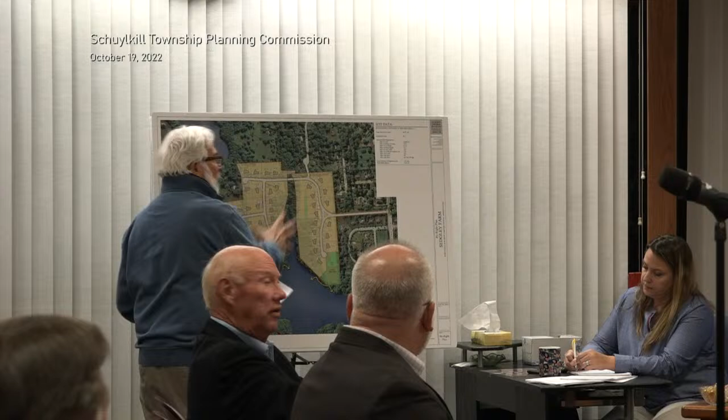So the project. Why don't you take the mic? It's portable, you can take it right up. Guess it's a good thing I'm not chewing gum at the same time here. Okay. I'll try to stay to the side here so it's okay on TV. Also from our development team, we have John Snyder, our land use attorney, and Jeremy Mazar from Chester Valley Engineers, our project civil engineer.

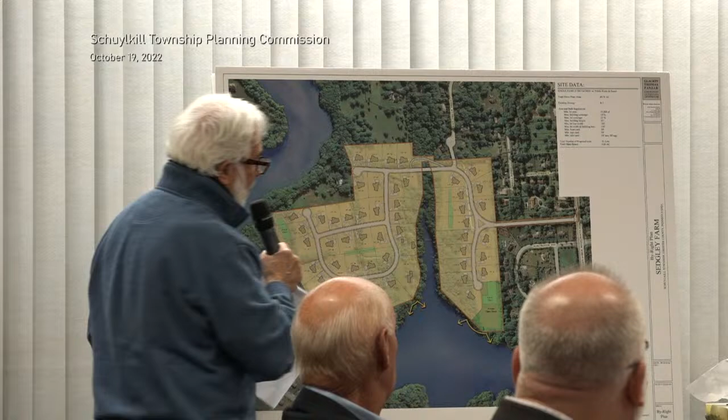The project is a 51-lot single-family development encompassing a little over 66 acres, comprising the Reeves property, shown in yellow, and 876 East Phillips Drive. There are 4 existing residences on the property: 1 on East Phillips and 3 on the Reeves property, including the William Reeves home, which is eligible to be on the historic register, a carriage home, and a tenant house at the back end of Lot 19.

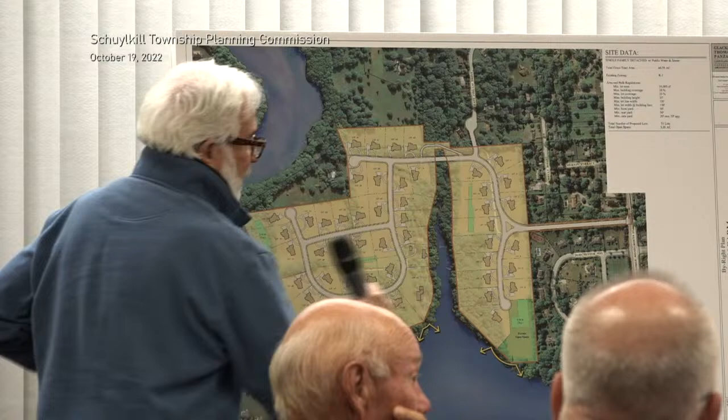It's located adjacent to Pickering Reservoir. Just a note, north is oriented to the right on this plan, because generally plans are drawn north-up, but due to the shape of the property here, north is to your right. The property is accessed from Valley Forge Road to the north and East Phillips Drive to the west. It's located in the R1 zoning district, and it abuts R2 zoning on the northwest — both the East Phillips area and Wells Road are R2 zoning — and on the northeast, Dorchester is R1 zoning.

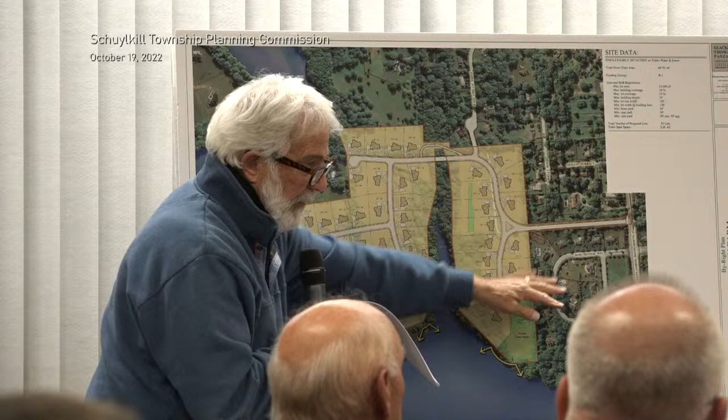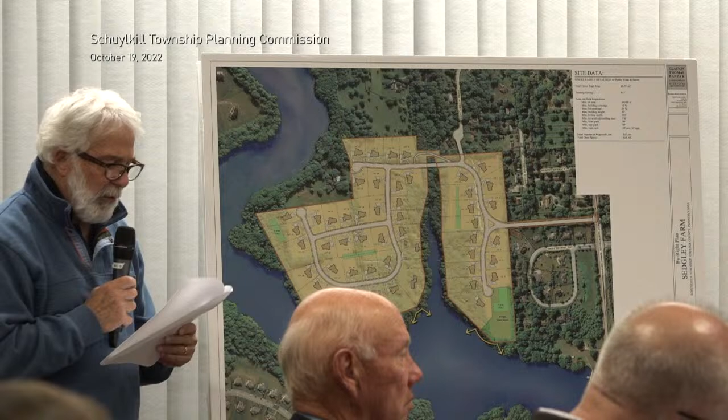As brief background, we last left off on this project about 13 years ago. On January 29th, 2009, we received Planning Commission recommendation for approval utilizing the alternate layout, sheet 43 of 48 of the plan set. The Planning Commission recommended waivers for a T versus a Y intersection at Sedgley and Eagle Road, and also recommended narrower cartway widths of 28 foot and 24 foot. They also recommended a private connection to East Phillips Drive with a posted private entrance and resort-style entry features to distinguish it from a public road. The township engineer at the time, Gilmore and Associates, also recommended preliminary approval granting the requested waivers for the alternate plan. The supervisors were due to make a decision a month later at their February 4th, 2009 meeting.

However, before that meeting, I received a call from Supervisor Jim Morrison on behalf of the supervisors, asking if I would hold off on the plan's approval and consider working with the township on a cluster plan.

That was going to be along the lines of a previous sketch that we presented to the township in September of 2005. We went over a couple ideas for cluster development with open space, and that didn't get anywhere, so we went ahead and filed for our plan, at the time a 56 lot plan.

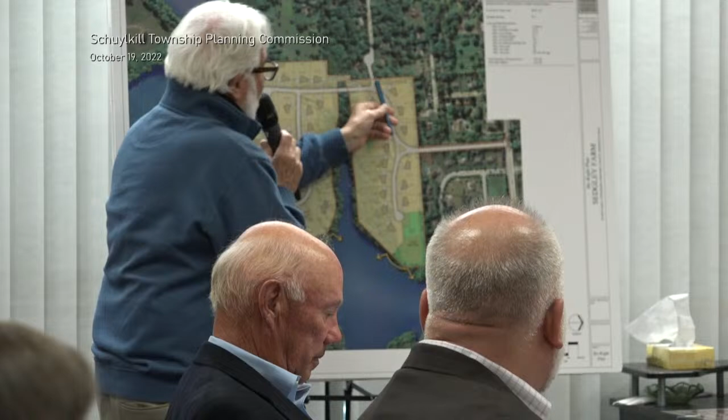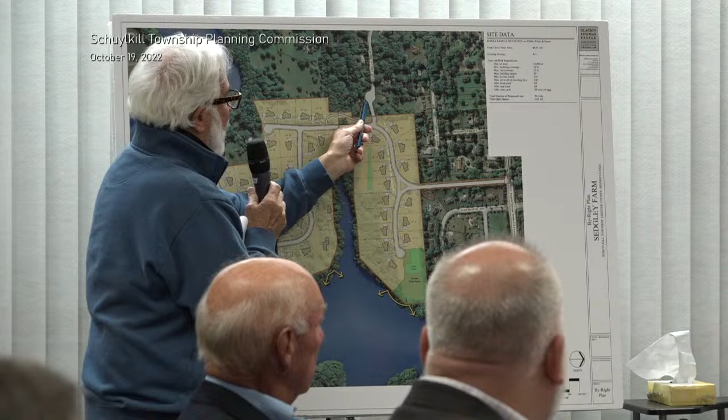The current lot line for this is this angled piece that's coming from the cul-de-sac to the Reeves property. And what we're doing is providing a right-of-way approximately 50-foot wide. The house will still have frontage on the cul-de-sac, the driveway is on the other side, and the backyard, none of that will change. It's just a connector right-of-way is what Select Sites Subdivision is doing, providing a right-of-way to the Reeves property.

And it's probably good for you to have some background on this. East Phillips Drive was designed and created to provide access to the Reeves property. The right-of-way, as shown on the original subdivision plan, extended all the way to the Reeves property. The township had the ability for the first 21 years after that plan was created and approved to accept dedication of that right-of-way and extend the road to the Reeves property. It didn't do that, so the right of the township to extend it expired after 21 years.

However, each owner of a lot within that subdivision retained its right to use that right-of-way. Now, in an effort to avoid unnecessary litigation over that, that right-of-way extends 25 feet onto the Select Sites property and 25 feet onto the property to its north. Instead of arguing with that neighbor that we have the right to build that road through that right-of-way as an owner of a lot within that subdivision, we elected to file this plan moving that right-of-way so that all 50 feet of it come from the Select Sites property.

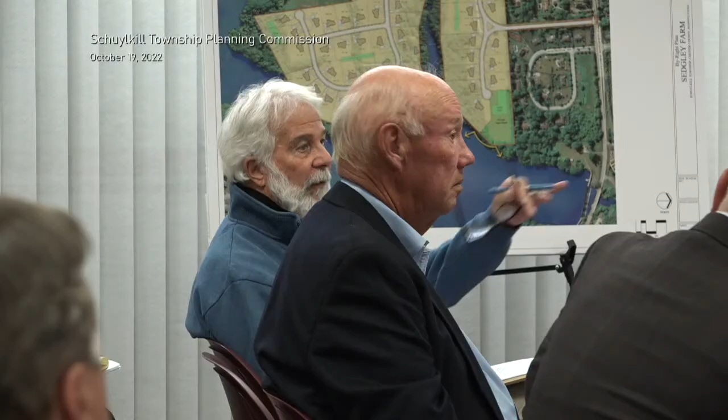30 years ago there may have been a descendant of the Reeves family still living there - it was the Reeves private country estate, essentially. That would not have been unusual planning back then, to establish how future development would happen in the township. That was considered good planning.

And who established that right-of-way? Would the Reeves have been involved in that? The Reeves were not involved in that. Okay, who would have been involved? They were a beneficiary of it. The township, or, I mean, who benefited from that?

Well, normally what would happen is a developer would come in with a plan, and the Township Planning Commission, the County Planning Commission, would indicate that good planning means you should provide for extension of streets to properties that could be served by it. So that would not have been in any way an unusual feature of a subdivision plan.

Any other planning commission members have any questions? Just, Paul, have you looked back at those from 30 years ago? I'm sure you probably haven't had the time to do that, but do you agree that all that was in place then?

The plan that was last revised in 1992 shows East Phillip Drive going through, and there's a cul-de-sac. There's an extension going towards the Reeves tract that says future right-of-way or something to that extent. Nothing had been acted upon, and like Mr. Snyder said, it was shared between 2 lots. East Phillip Drive, as it goes down, is a straight shot, and the bulb goes off to the side. The way the right-of-way was laid out, the easement originally would have gone as if East Phillip Drive wasn't a cul-de-sac - it would be a straight line.

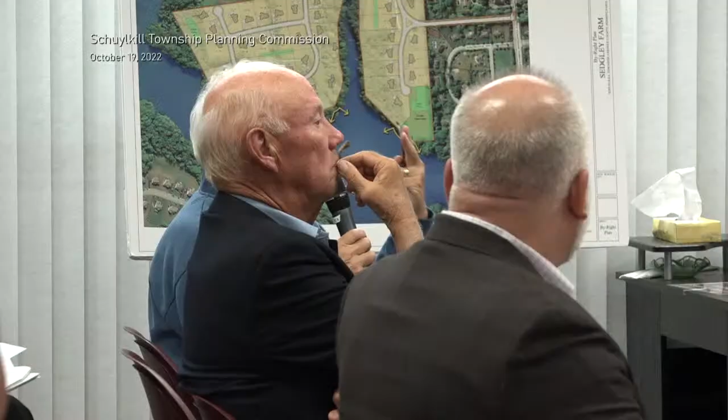Mr. Puliga, at the end of your introduction, you ran through something about various options, a couple different plans. There have been two PRD plans. That was at the very end, I think with reference to what's going on up here. The alternate? The alternate plan, yes. The plans submitted to the township also include an alternate plan.

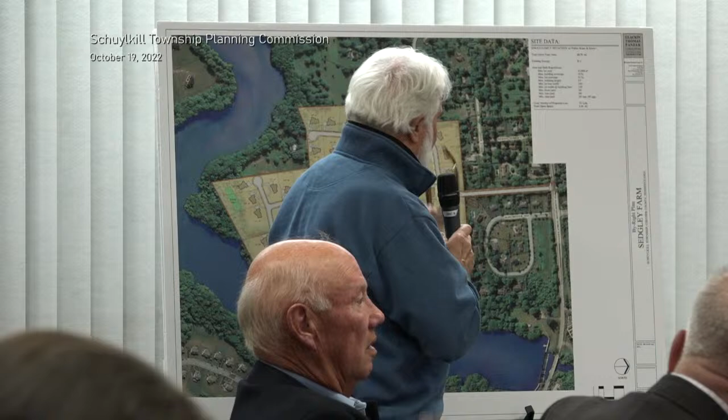That alternate plan had recommended, the planning commission back before we shelved it, recommended that we go to a T intersection instead of the Y intersection, and also recommended narrower roadway widths than the code, especially the road coming in from Valley Forge Road into the property. There's no houses taking access, so there's no reason to have a 32-foot cartway there, and to reduce the amount of impervious coverage and water runoff, they suggested a narrower cartway as well.

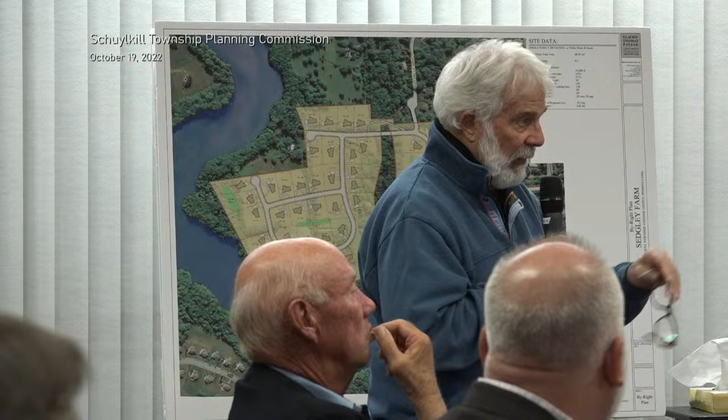Does this plan in front of us tonight reflect those recommendations? They are, but the engineer, Paul, has not reviewed that alternate sheet, as I understand, but that sheet is included in the plan set that you have. Okay, just to be clear, the plan set in general, without that alternate sheet, is designed to provide that there be no variances and no waivers, so it was designed to be totally compliant.

The recommendation of the planning commission with respect to width of roadway, and length of cul-de-sac as a result of putting in a T intersection, those would require waivers. So from our standpoint, we obviously don't want a plan that simply requests waivers, because that means you could turn us down by denying the waivers. So we have a plan that is compliant, and an alternate plan where if you want to provide the waivers for those items I just mentioned, there's a sheet in there that you can recommend approval with those waivers.

There were more waivers back in 2008 with respect to that alternate plan, but a number of those issues were involved in the litigation with the township over this plan that occurred in 2009, 2010, and then resulted in a decision by Judge Nagel on some of those items that would have required waivers if you followed the township's interpretation of their ordinance. Those were disallowed by the court, and the Commonwealth Court affirmed Judge Nagel's decision.

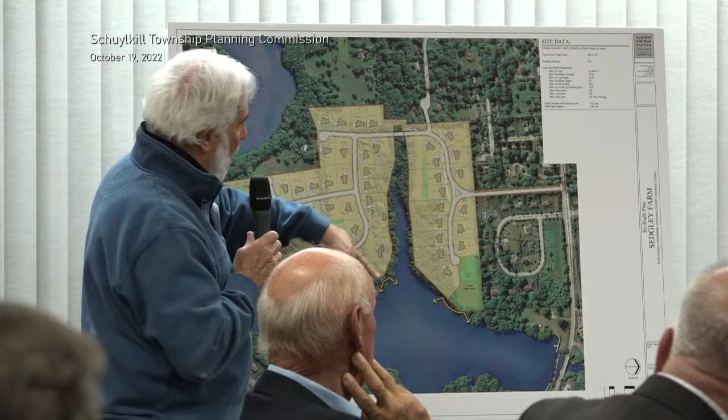You said something about 56 versus 51? Yes, our original plan was 56 lots. We'd been to the Historic Commission and the Planning Commission before, and one thing we were asked to do was add more area to the William Reeves house. So we took the adjacent lot line and swung it around for a better view of the reservoir, and eliminated a lot between this and the carriage house. Previously our stormwater management was back where the carriage house is. They asked if we could leave the carriage house, so we have that by itself on a lot. Both the William Reeves house and the carriage house will be sold as-is on two different lots. So through the approval process, we went from 56 lots to 51 lots.

Okay, so we kind of wandered into the other portion of the review letter—we're just trying to get all the facts straight. We were looking specifically at the Select Sites one-acre lot on East Phillips and the shorter review letter. If there are any more questions on that application from the planning commission, we can look at that. Other than that, I'd like to have Paul go through and give his summary.

I'm going to jump in before we go—just before we leave Select Sites, I think it would help the planning commission if we summarize the discussion, and if anybody has the sequence of events of how it started, because I remember it was going to be a private road that would be closed off. It's a limited access road—the planning commission asked for it. I think it started out as fire access. Just how did that happen?

No, the original plan that was filed was, in essence, this plan. The Select Sites property is not on here. It was a single access to Route 23.

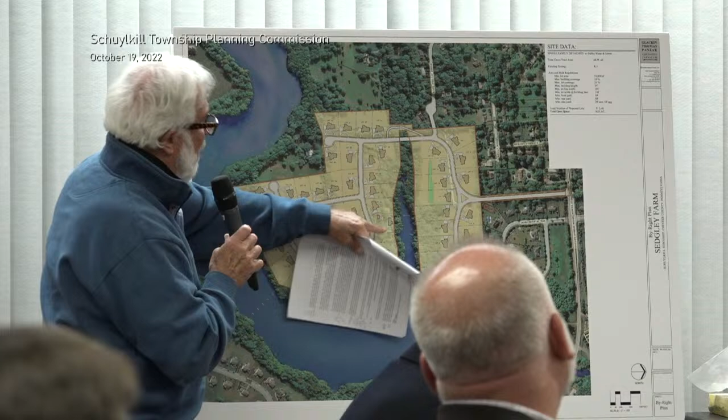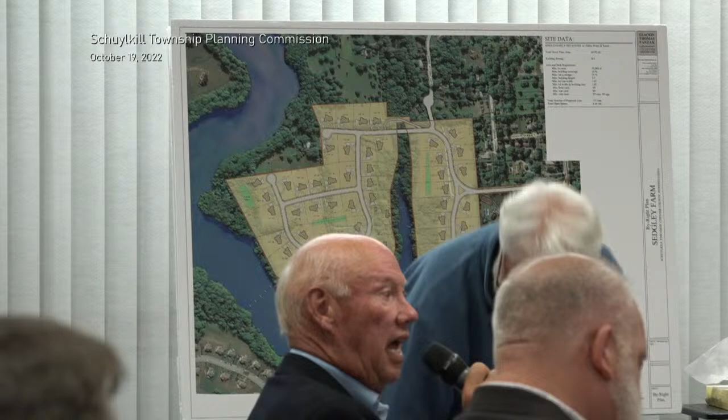The only way that garage can be in the rear of the structure it relates to is if the road were in that spot. No, but it could be in the front as long as there's enough frontage, right? No, it can't be in the rear yard ever. You can't put the garage in the front of the property? No, it has to be in the rear yard, behind the house. Okay, sorry.

So that's a matter, I think, of the supervisors determining whether they think historically they want to keep it or not. So I'm good either way with that.

So the next comment I'll direct you to is comment C number 12, on page number 6. That comment says that no fence or wall may be built within the legal right-of-way or within 5 feet of a cartway, whichever is greater.

What we're commenting on is that on Sedgley Lane, the access way from Valley Forge Road up into the subdivision, there's a retaining wall within the right-of-way, and we're saying that's not in compliance. On the east side of Sedgley Lane, it's the longer length of wall.

On the western side of Sedgley Lane, it's a shorter length of wall. I want to note that on the east side, it's basically pavement, curb, and then the wall. When you think about the safety of this, you don't want a curb and a wall, because it's going to accentuate a drop should a vehicle or person fall. On the western side, it's pavement, curb, a little bit of sidewalk and grass, and then the wall, all within the 50-foot right-of-way for Sedgley Lane.

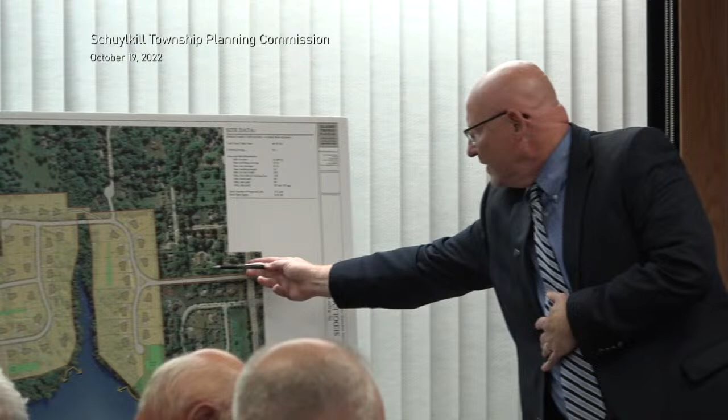The next comment I'd like to direct your attention to is on both pages 8 and 9, comment D number 5. I'll stand up to help guide you through what's going on here. So what I'll be talking about right now is this area—you're here on Sedgley Lane, and between those two lots on Dorchester. I'll go to this side so everyone can see it.

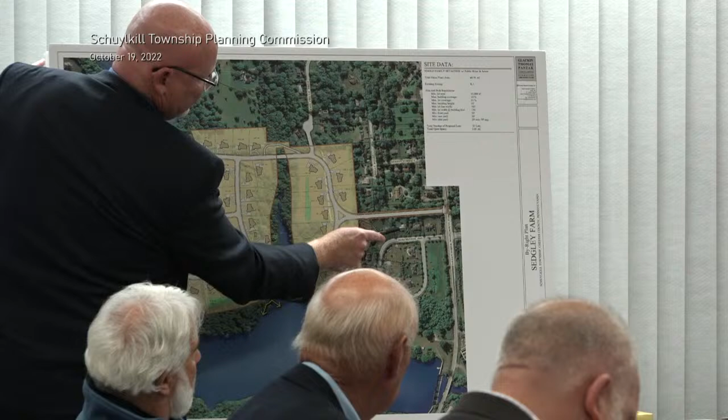So the next thing I'm going to talk about is an area right here, this common lot area between—this is Chapel View Estates. I know this is lot number 3, not lot number 4. Off the top of my head, I don't know what the UPI numbers are, but I just want to give you perspective of what this comment is going to be about.

So the applicant is proposing a storm sewer system that starts with a headwall, on the upstream side, which would be the west side, the high side of this plan view. They're proposing a headwall there to collect drainage. Our first comment, part A, is that the headwall is going to be very close to the existing property line on Belmont Terrace, and it's also lower than the existing grade. So one of our concerns is that between having to put in some stabilization, some riprap, it's going to encroach onto the adjoining property.

Secondly, the proposed improvements: the head wall is going to have 2 inlets on Sedgley Lane, and the applicant is proposing to go into an existing storm easement shared between 2 properties on Chapel View Estates, UPI 27-648.3 and UPI 27-648.4. I'll just call them Chapel View Estates lots 3 and 4.

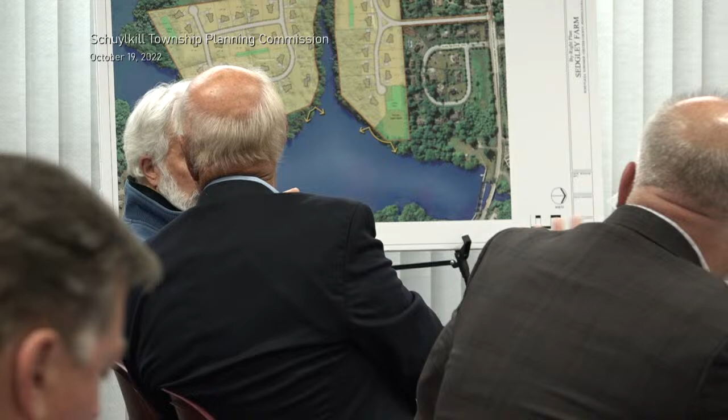There's no document, no written easement. This is a common law easement you're talking about, right? I haven't researched it because I just saw this today. I know that's where the water comes from. If you have documentation you want us to look at as to whether it's a specific easement or a common law easement, that's fine. But from our standpoint, either way, all we're doing is keeping the water going where it comes now.

As I recall, that was the recommendation of the previous township engineer as to how to tie that in. Just going along with this, that land is owned by two lots, 3 and 4. And it's clearly stated on the Chapel View Estates easement, and that's why I want to bring to attention that going onto that easement, the applicant is not a beneficiary of that easement. It would have to be granted access.

It's still a public safety kind of thing, a riparian buffer, and what they're planning to do is practical and appropriate. If our water goes there now, we don't need an easement for where our water naturally goes. So I disagree that we would need to somehow obtain an easement from those two landowners. They're burdened by the fact that the water goes there.

But you're tying into, you're saying you have the benefit to go into an existing easement that is owned by two other parties. If you wish us to stop, to end up with our discharge at our property line and have it go over ground for 50 feet until it gets to that inlet for their pipe, fine, we'll do that. Yeah, but that's not good practice, right?

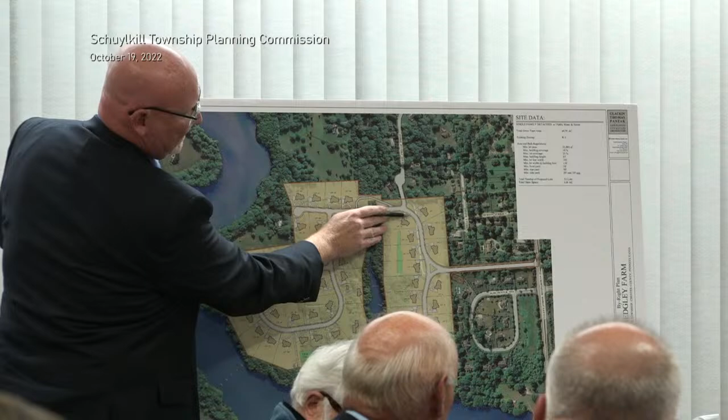Going into the next comment, E21, shared on pages 17 and 18. I'll get up and show you what I'm talking about over here. I'm describing East Phillip Drive, the cul-de-sac, and then the East Phillip Drive connection coming into Eagles Point right here. So the way I'm drawing my pen down here is what I'm going to try to explain to everyone.

Excuse me, so our concern here is with the cul-de-sac bulb turning there. If you're a car driving on East Phillip Drive heading into the Reeves tract, imagine this: you're driving straight, you have to bank your car to the right to go into the cul-de-sac bulb because the connection to East Phillip is offset. You can see how it has that little turn. So you bank right, then bank left, maybe a little tangent, then bank right again, and if making a left-hand turn you turn that way too.

The whole configuration, in simple terms, is called horizontal curves. It's a reverse curve if you don't have a proper amount of tangent. What I'm trying to explain is that roads are designed so that when you turn the wheel, the driver can then straighten out and go straight again. Having a motion where you're doing like this is not optimal.

Now this is a residential street, but there are still requirements for tangencies and reverse curves. The plans didn't show anything there, but when you look at it, you can recognize that the existing bulb may not have the issue, but the through traffic going to the Reeves tract has this turning motion we're concerned with. So we're asking the applicant to look at this situation, look at the radii provided, and make sure proper tangents are included and reverse curves are eliminated.

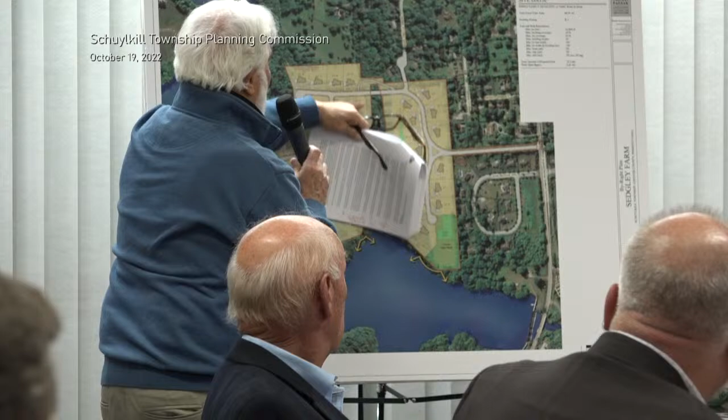Sure, happy to. Number one, we did discuss with the planning commission where the sidewalks would be, and they were comfortable with sidewalks on one side, which is why we're showing them there. That was a direct discussion with the previous planning commission. The other thing is we were going to have this emergency access, and we were bringing the sidewalk to that, having it be part of the connection so that walking is not happening over the bridge. That's in particular why we did that.

But that's only 12 feet wide, and that's to be used by traffic if need be, and it's not ADA compliant. It doesn't have the proper slope. So there is a disconnect between the sidewalk and the ADA compliance with this. It goes over 4% cross slope there. Okay, yeah, we could take a look at that.

The idea was to keep people off the bridge and have them walk around the side. I don't know if I feel comfortable saying people are going to use an emergency access way as the sidewalk. Well, the sidewalk feeds into it and then comes out of it. So if you're walking on the paved concrete area you're supposed to be on, it takes you to that and then drops you off. So I don't think there'll be an issue of visual misunderstanding.

The question of whether we meet ADA is an issue we'll have to look at, because we obviously would have to. But we also have to deal with the fact that it's the emergency access. So in the event there's an emergency and the road can't be used, somebody who has to use this is sharing it with two-way vehicular traffic with no sidewalk. And if there's an emergency and that's being used, if the sidewalk went over the bridge, that's where the emergency would be, and they wouldn't be walking there anyway. So I discount that concern, but we will certainly look at the ADA issue of it.

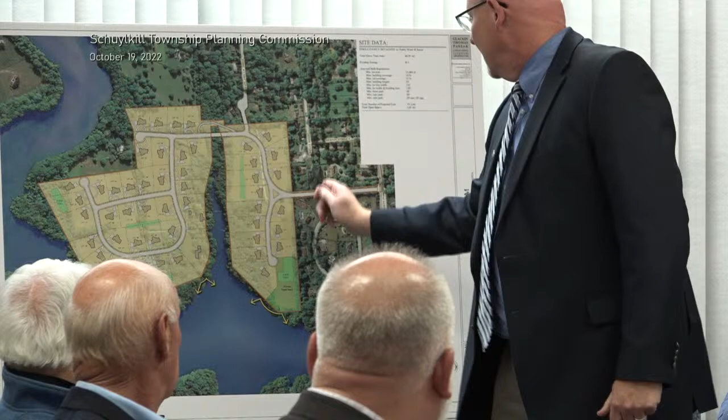They're calling the water drainage areas here and here, where we feel as if there's a drainage shed here, one here, one over here, one over here. That's what we're saying, that they are looking at it as a whole, but you have to look at each individual drainage shed and apply the pre and post reductions accordingly. So those were the comments, basically 44 and 45.

44 is what I'm saying, that 3 of the storm events are greater than what they should be, and 45, I'm saying there should be multiple points of interest of the stormwater management being reviewed.

Any questions? I'll proceed forward. That's an engineering. Okay. Ultimately, it all gets to the reservoir.

That's the point. No, I understand, Mr. Pollack, I was just saying that according to the ordinance, it shall be released to the nearest waterway or downstream property in the manner of the pre-development conditions. So that's why it's bisected. It is in the manner of the pre-development conditions, just like I read that page, because there's no comma in that sentence. So if it's released to the nearest waterway, it's not in a manner similar to pre-development conditions. If it's on downslope property, it has to be in that manner. You would need a comma if it was to apply to both.

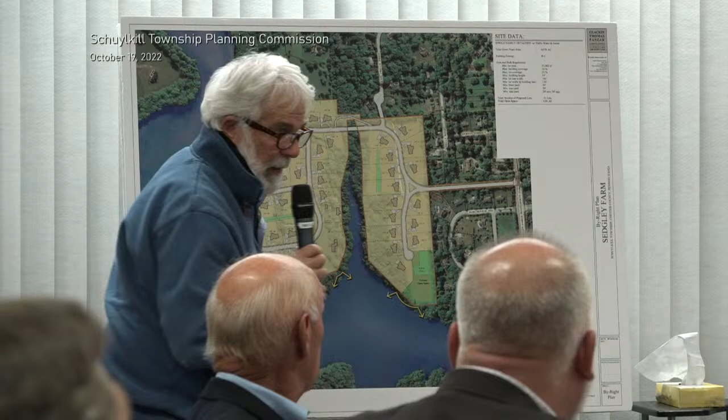Yeah, I can answer that, I'm familiar with that. The Makala 5-acre out parcel has an easement over the Reeves property to utilize the stone driveway. So their access in and out of that property right now actually takes the existing driveway location. You can see it come here, comes across here, and goes out. They also have the obligation to pay for a third of the maintenance of that.

I think the son-in-law from previous Reeves, that's where that property came from, so it was a family situation. But at one time it was a 50-50 split of the shared cost, and now that was redone. It's a third. And will they be granted access then to the roads as part of the Eagle Point development?

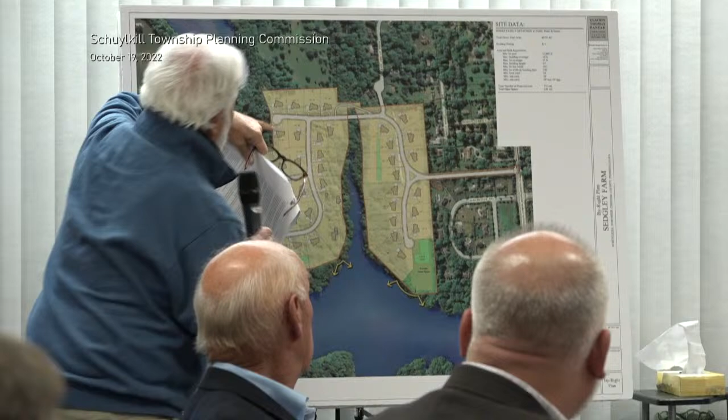Yeah, so what we're trying to do is replace their easement with direct access to a public road. That was the idea of ending the cul-de-sac and giving them 105-foot frontage at that location. If you look at the right of way, we're providing 105 feet so that it has frontage on a public road. And they'd be responsible, by the way, for the connection to their driveway. We're also providing the ability to tie into our sewer and get public water, so we're trying to bring them up to speed.

But we're not changing their property lines at all? Not touching their property lines. Right.

All right, the next comment I'll direct your attention to is F1, which is on page number 30. This is under the general comments, and this is talking about the PennDOT permits that will be required, in particular to Valley Forge Road and Sedgley Lane.

The first comment, 1A, talks about the existing sight distance. It's shown on the plans as being 550 feet on either side of Sedgley Lane. Although this is a PennDOT road and we'll defer to it, we wanted to note that there was no vertical profile shown. So when you have a sight distance, you take a look at where the eyes of the driver would be, and you strike a profile of the two views, and none was provided to verify that there was no obstructions or that the adequate 550 foot sight distance has been provided.

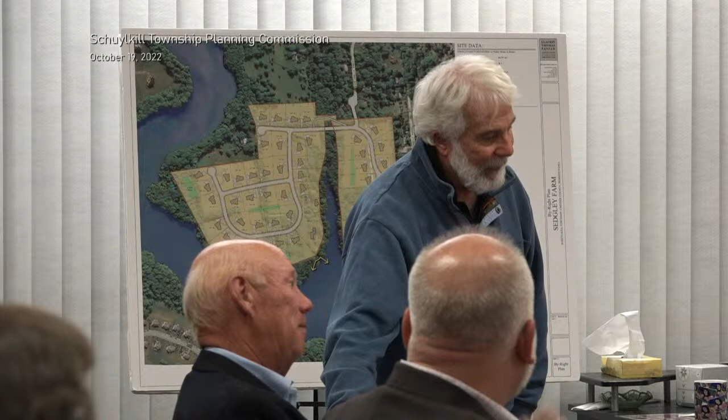I'll just say one thing, it would be helpful if you take a look at the alternate plan, because a lot of things we're gonna do here would make sense on one plan and not another. So if we could get a sense from the township on a direction on the alternates, we could filter that into the resolutions. That would be a good idea. Except that until we get that alternate plan approved by the supervisors, we still have to have the basic plan that's compliant in all respects.

Sorry, one more question. I don't think you addressed what size the houses are going to be. That is undetermined at this time. My guess is we're well over $1 million, probably, for the houses. We're not gonna do the product again, we did that back in 2008. We're gonna wait till we know what we're doing here.

And at that point, we'll talk about lot sizes. What size are the lots? The minimum size is 35,000 square feet. Less than that, the R1 zoning, just like your Dorchester.

So what is your unit per acre, acreage count on this? Is it 2 units per acre, 1 unit per acre for the overall site? I missed that, I'm sorry. 51 lots, 66 acres. So 66 and 51 is basically 3 something, so about 7/10 of a unit an acre. Okay, but you don't know. So you're not trying to crowd a lot of units into a space.

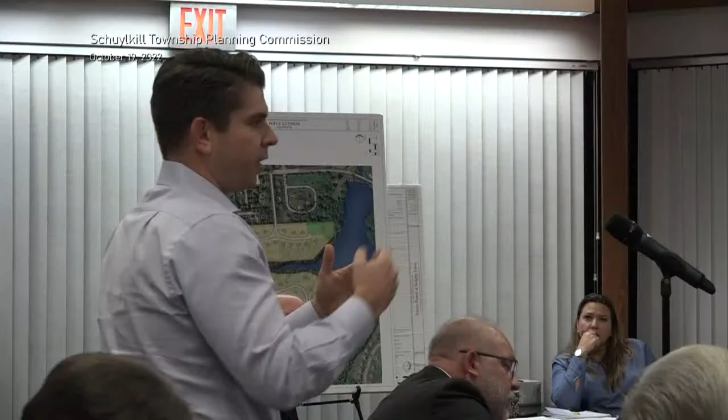But respectfully, isn't the point of the planning committee to also plan in accordance with PennDOT? Most definitely. Your request there would be a future ask of PennDOT to provide to the township, which isn't granted yet. As a planning commission, your job is to plan in accordance with what we have today. So I just want to rebut that argument a little bit and make that clear.

Steve Kunz from the Environmental Advisory Council. Somebody was asking where this goes next from here. Well, the very next thing, maybe not for the Planning Commission, but next week on Tuesday, Todd Polich and his crew will be presenting to the Environmental Advisory Council. We are preparing a comment letter that'll have to be in draft form for that meeting. But we have a lot of comments and concerns to discuss next Tuesday with the applicant. I was glad to hear some of the studies are being updated, the wetland study, the PNDI study.

I have a question about one of the concerns the EAC had originally about the wetland study, and still has, which is that it was mostly focused on the Reeves property. Of course, if you go just off the Reeves property, you're onto Aqua land, which is a reservoir with additional wetlands. So originally they said there are no wetlands on the property, which was correct, but it wasn't correct to say there were no wetlands involved with the project, because Eagles Point Boulevard crosses an easement across Aqua's land, and there were wetlands there.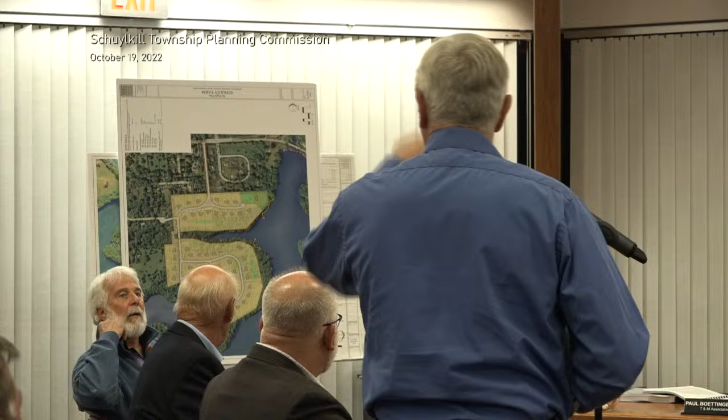So I'm hoping that the updated wetland study will look not only at the Reeves property, but the Aqua land as well. And we did that—the latest wetland study went over onto Aqua's property. We haven't seen that. We saw something for select sites. Is that what you're talking about? No, that little seven flags? No, okay, we'll make sure it's included.

We agree with that. All right, we look forward to discussing things with you next week. Thank you, Steve. I would just add one more thing, sorry—I didn't think your memo was the least bit vague.

Okay, I guess procedurally, do we need to officially table this, or just move on? You would just move on to your next item on the agenda if there is one, and if not, you'd adjourn. Can I just ask one last question real quick?

Why is there not, or can there not be, a homeowners association for this project? I didn't say there would be or wouldn't. Okay, because you were saying that the PRD had a homeowners association, and that was good because you could require the homeowners association owned a large chunk of land which acted as a buffer from the residential properties to the reservoir. In this case, the residential lands go to the edge of the property. That's what Todd was talking about as being beneficial under the PRD for quality stormwater management.

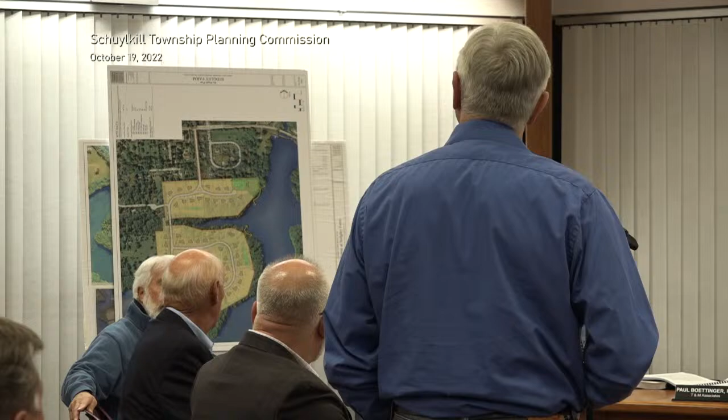But there could be a homeowners association here? Likely will be, yeah. Okay, good, thanks, that would be very helpful. Sure, they'll tell us when to take the Christmas lights down, when to put the trash cans away, all that good stuff.